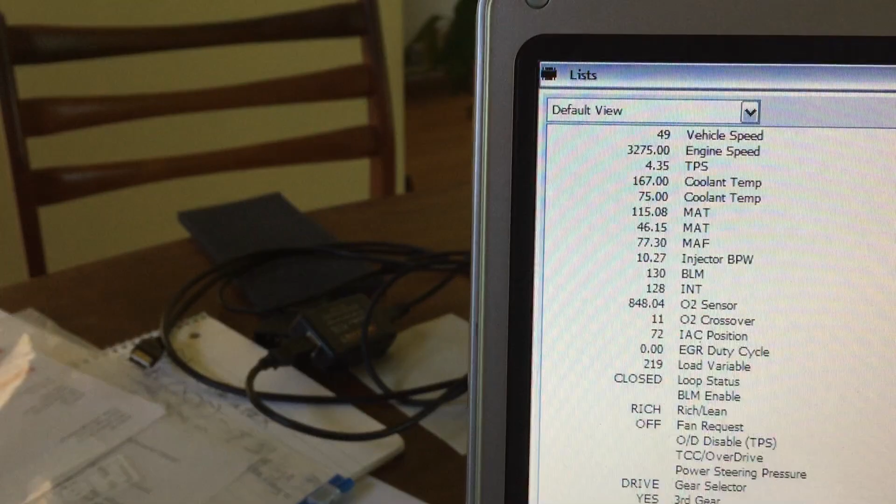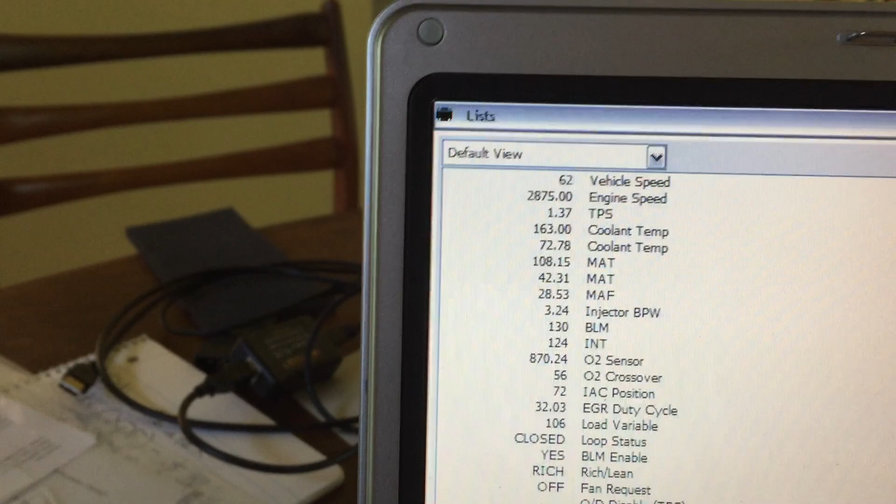We'll hit play and we'll go to the lists, and here we go. You can see I had a pretty good little run here. I don't know, maybe I'm just showing off, but it's showing pretty much the correct vehicle speed. Look at that top number there. I was up running around between 55 and 70 miles an hour, and you can see it kind of corresponds to the engine speed. There goes the throttle position sensor. See, it's got pretty high numbers on the TPS there, so giving it a lot of throttle there.

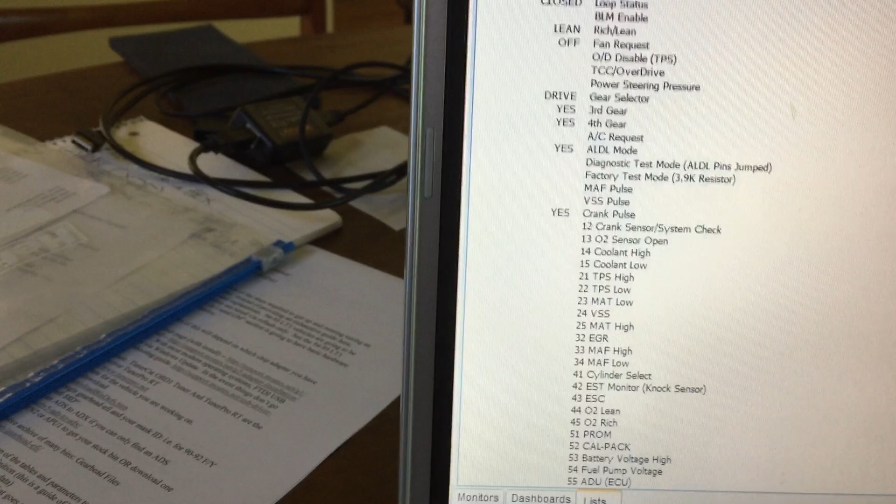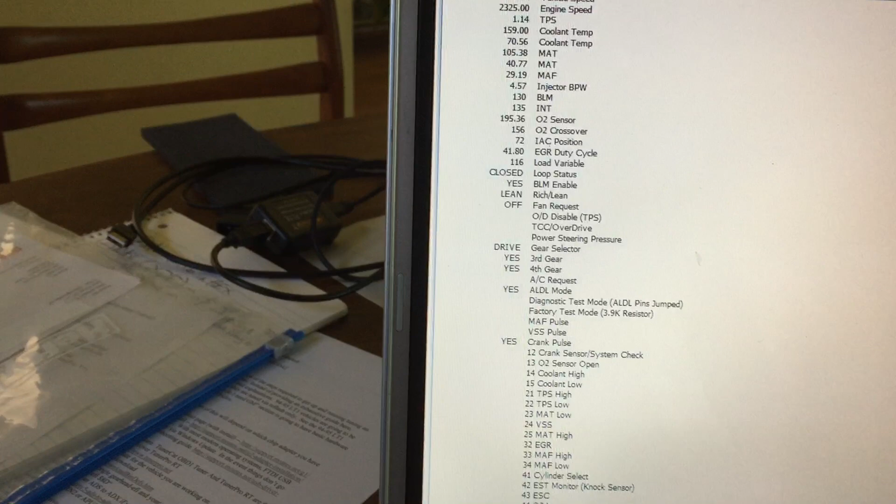Anyhow, you come down here where I was getting the errors. Get my finger in here. The fuel pump voltage was where I was getting an error on the other computer, and I was also getting the 24 vehicle speed sensor error. And I drove this enough that it should have picked up the errors if they existed. Now maybe it's the computer, maybe it's something else, I don't know.

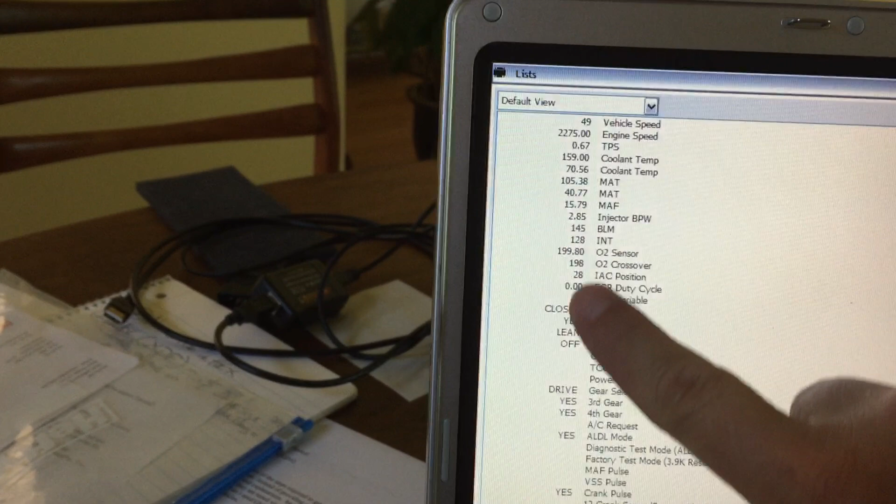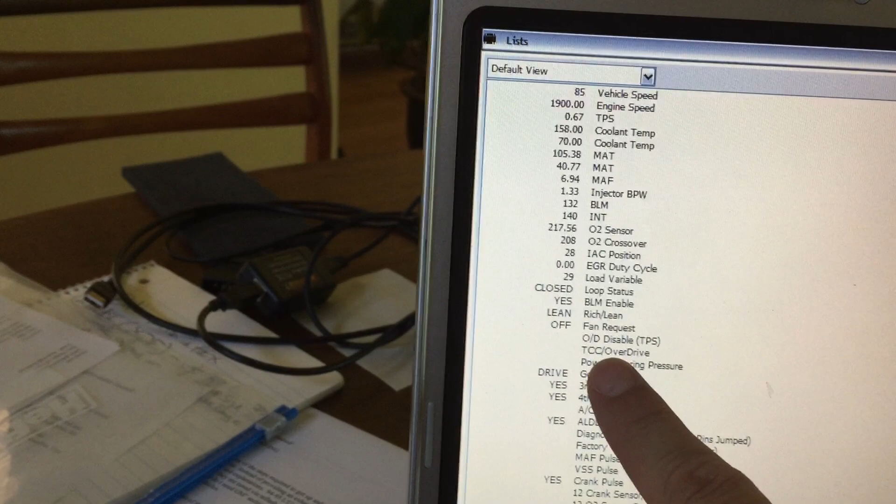Another question for you is we've got all these values here. Loop status is closed. BLM enabled, yes. Rich lean, it's currently lean at this point in the log. Fan request is off. Some of these things I don't know if my car even has. I'm not sure where it has this third gear, fourth gear thing selected.

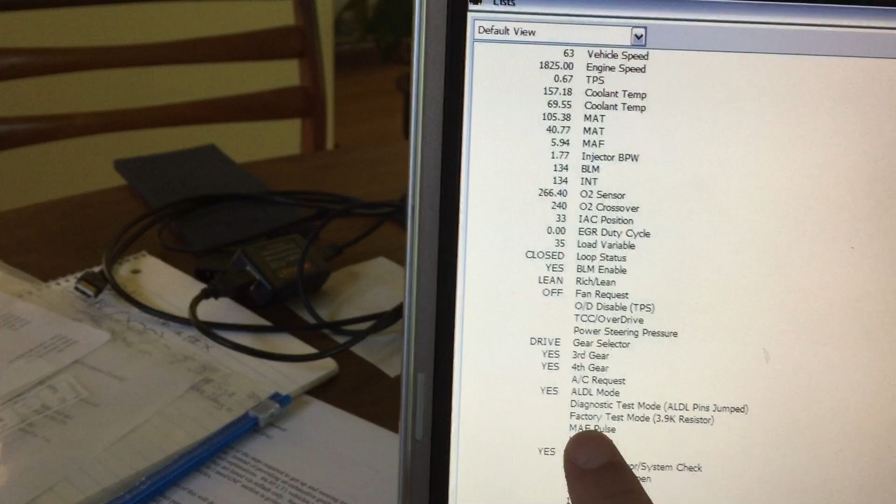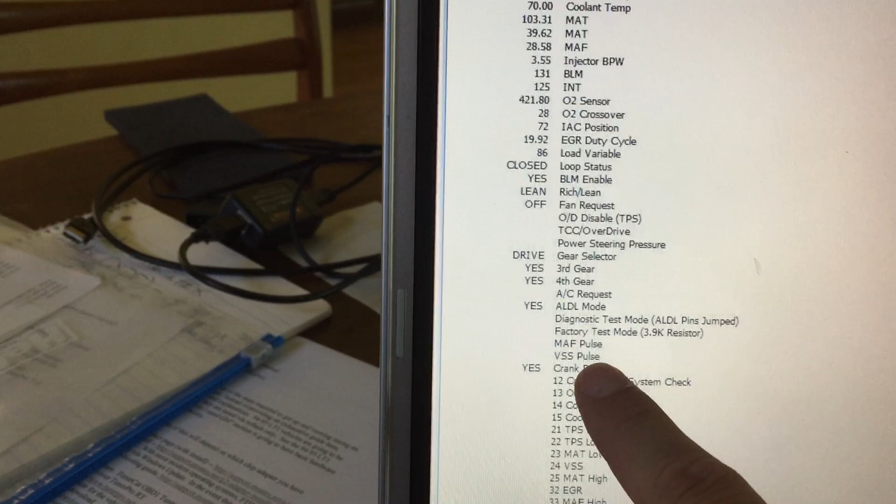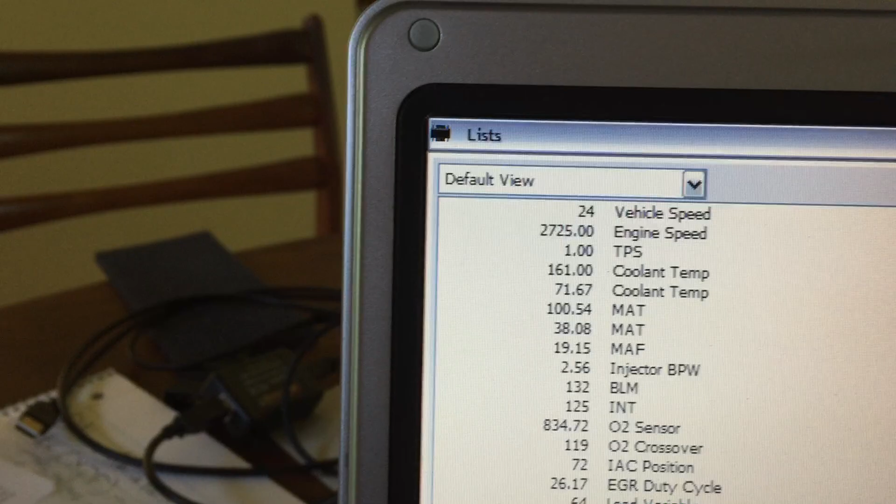But coming down here to some of this other stuff, in particular let's focus on this VSS pulse. And we're talking about this in the context of the transmission forum. Why is this vehicle speed sensor giving some of these sort of crazy numbers? Like, come up here now, it's showing probably good numbers. Look at that, engine speed is fairly high, throttle position sensor is fairly open. So I'm driving a little fast there, not driving 98, but there it goes, it's jumping around.

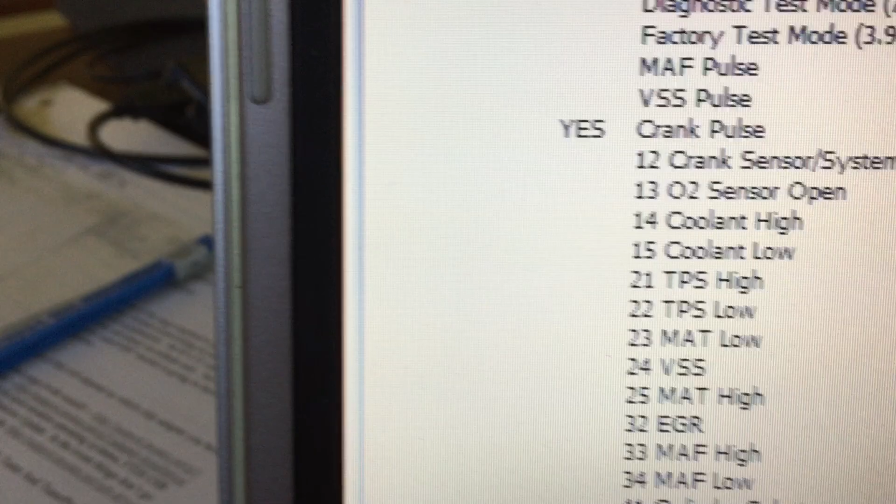So my point is it should be logging an error of some sort under the vehicle speed sensor, an error 24, vehicle speed sensor. We got nothing there, and the fuel pump's not giving an error message either. I don't know. Maybe I'm just getting intermittent errors, but any insights that anybody with TunerPro experience has or knows about these cars in particular can share, I would greatly appreciate it.